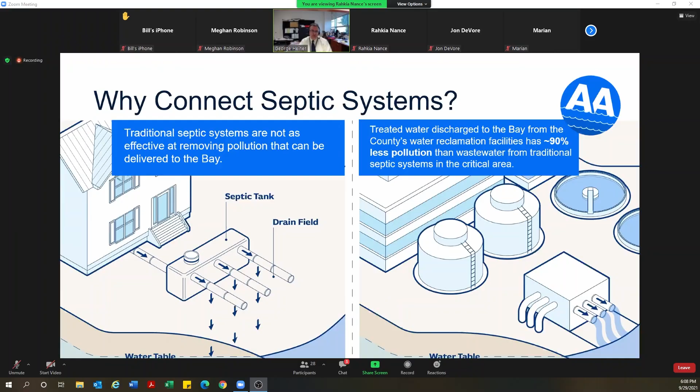Septic systems in general are a significant source within Anne Arundel County. There's 40,000 septic systems in Anne Arundel County, 13,000 in the critical area, which is within 1,000 foot of a tidal waterway. That's a significant proportion of all the critical area septic systems statewide. Beyond just that septic influence in the waterway that makes its way to the Chesapeake Bay, there's also impacts on the local rivers and watersheds within Anne Arundel County.

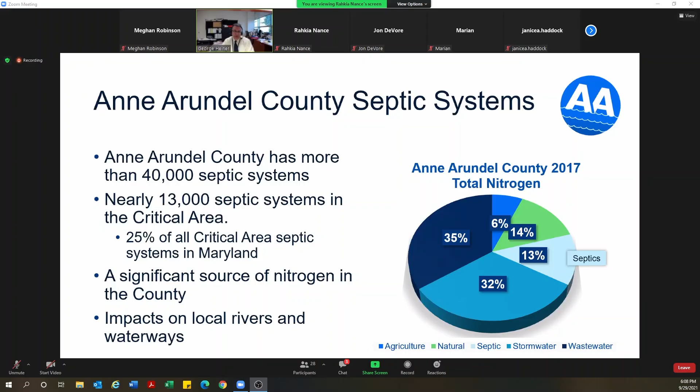Can you go to the next slide? So there's a lot of information on this slide, but to really condense this down, what this is showing is the average estimated nitrogen load from a household, one single household in nitrogen per year. On the right-hand side, you can see in the critical area, so there's that area very close to the water's edge, a typical conventional septic system would deliver about 18 pounds per year per household.

If you have a BAT system, which does 50% removal, that's a significant increase in removal, so that takes it down to 9. And then on the light green bar, which is our treatment plants, actually what they call now enhanced nutrient removal facilities, so we call them ENR facilities, if we discharge at the permit limit, that load per household would be 3 pounds per household per year, but our current performance has been about half of what the permit limit is. So really the current delivery from a household is about 1.5 pounds per household.

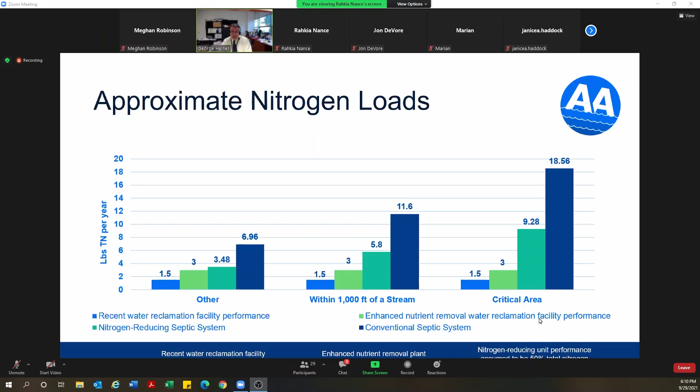So as you can see, there's a significant opportunity as septic systems connect to be able to reduce the nitrogen load to the waterways. The influence is greatest in the critical area because that's where the delivery is the greatest. Can we go to the next slide?

So what are some of the benefits of this whole program? For the general public and kind of where DPW is broader interested is in the decrease in nitrogen discharges into the Chesapeake Bay. This is going to help us maintain long-term requirements for nutrients. We're compliant right now with the Chesapeake Bay nutrient goals. Part of this multi-pronged strategy that I mentioned at the outset was, how do we maintain compliance going forward? So this program is an element of that overall strategy.

There's also some benefits for the homeowners, and these can be very site specific. So we're not going to really dwell on these, but we're going to mention a couple of the ones we've heard anecdotally from different people in some of these other meetings.

Sometimes the size of your septic system and your drain field is related to the size of your house, and if you want to do a significant addition or change to your house, that septic system can be a restriction. The drain field, whether it's behind the house or wherever it is, limits the use of that space within your property, and very often you need to have the drain field plus reserve space. So that can impact how you're able to use your property.

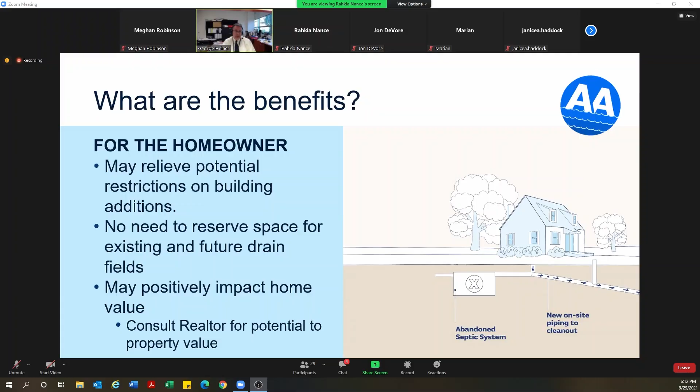There's also an impact on the home value. We're usually really reluctant to say much about that, other than to consult a realtor if you're really interested in knowing what the difference might be in the value of a home. So you can go to the next slide.

For those that are still on a private well, there's less risk of contamination from a septic drain field. In this diagram, we're showing the well pretty close, but that's because we're just trying to condense the graphic. As most of you probably know, there's quite a bit of separation between your well and your septic system. It's not unusual to see one in the front of the house and the other on the other side of the house.

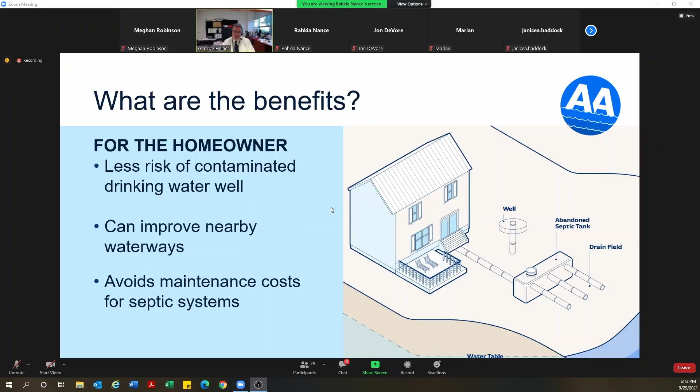We mentioned improvements to local waterways, and also you can avoid some of those ongoing septic system maintenance costs. So we have the next slide. These are very general numbers that we've taken from the state's website and some other research. It's just to remind you there is a cost associated with keeping a septic system, and from what we understand, replacing the drain field is one of the most significant costs if you have to get it replaced.

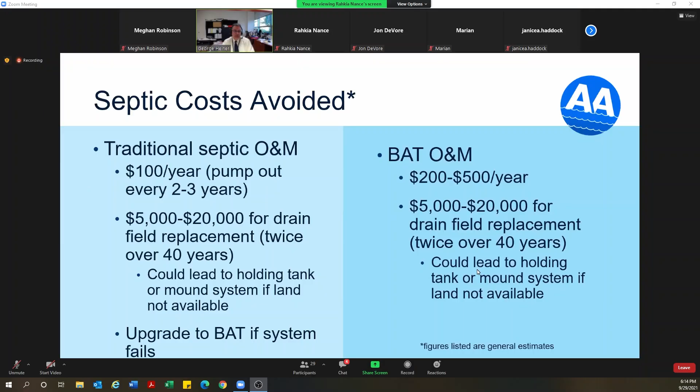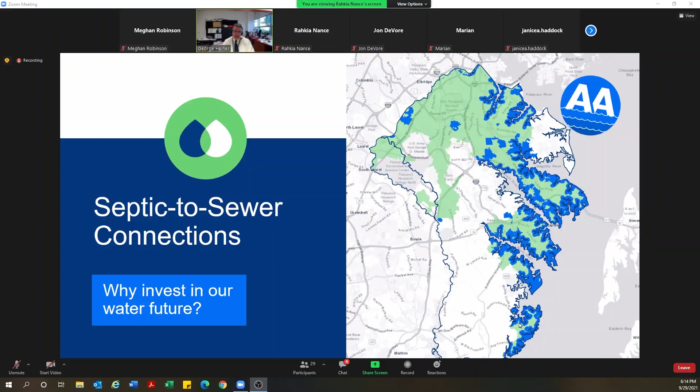Okay, so when we're talking about the septic to sewer connection program, it's really focused on specific areas that are called eligible areas in the county code. On this graphic, you see in green all of the sewer service area within the county, but the blue areas are really the focus of the septic sewer connection program. We'll talk a little bit more about what makes an area eligible as we get further into the presentation.

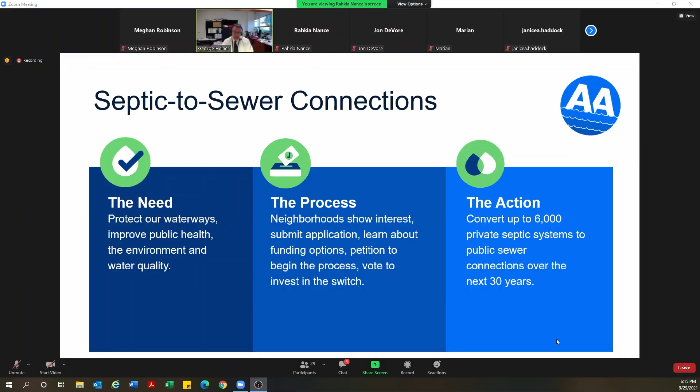So overall, to sum up the program: we have a need to protect our waterways and improve water quality. We have a process, the petition process, which we've refined with changes. We've been developing this process for neighborhoods to show interest, submit an application if they're interested, learn about funding options, and then move to the petition process if that's a good fit for them. Our action plan is to try to get 6,000 septic systems connected over the next 30 years, so approximately 200 per year.

So, this is a good transition. I know that this neighborhood had a sewer petition a long time ago—I don't quite remember how long ago it was. So there's probably some people on the call that are familiar with the petition process through that experience.

Most of what we're going to be talking about in this presentation are the things that have changed in the petition process. A little bit of background on how we got to this point: initially when the state came out with guidance for reducing nitrogen levels, it was looking for Anne Arundel County to reduce septic sector loads by close to 50%. Out of that inventory of 40,000 septic systems in the county, that meant we started looking at whether it was possible to connect up to 20,000 septic systems.

So we developed a lot of conceptual layouts, which is really the basis of the information we're going to be talking about tonight, and developed some basic costs for that. But we decided to start a septic task force, which had components from the business community, environmental groups, and community groups. We talked about some of the issues involved in trying to develop changes to the septic connection program, and used the task force to give us feedback on policies, prioritization criteria, and suggestions on subsidies, incentives, and our outreach.

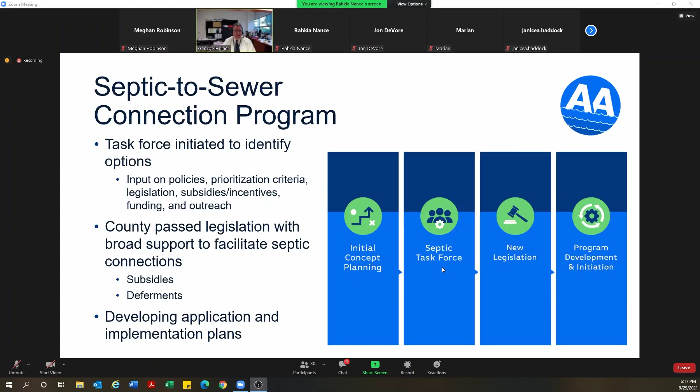We're going to be talking about that in more detail later regarding those deferment and subsidy discussions. Because there are so many possible areas that could connect, we've also developed an application process, since we couldn't practically offer subsidy to every conceivable area. So there's an application and ranking process we'll talk about later.

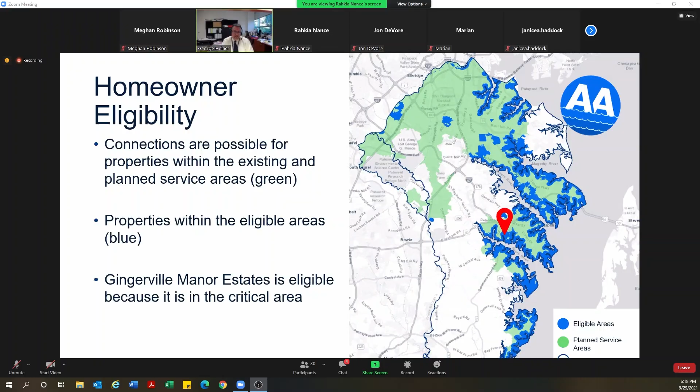A lot of the Gingerville area is eligible because it is in the critical area.

On this map is a potential area to be served. What I want to clarify is that this was a conceptual planning effort we were doing in DPW, looking at what areas could possibly be connected to the public system. This is not a defined project area that the county is planning to start. But we present it because we already have the information and an idea of what that area could look like if everybody in the drainage area was interested.

A little further on, we're going to talk more about a project area, and a project area can be any size. A project can be 10 houses, 50 houses, 100 houses, or everything here. The project area is really defined by the residents who turn in the petition.

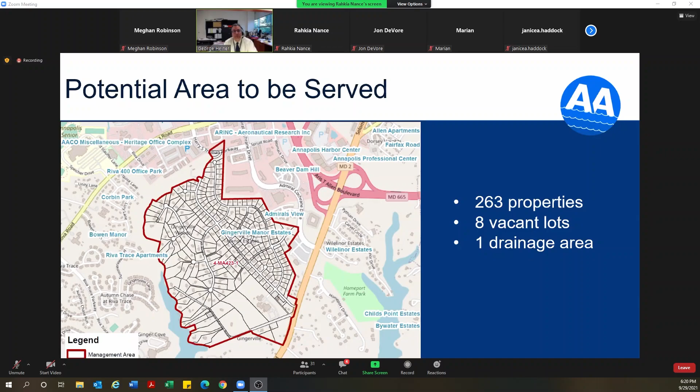So when we're showing this map, what we want people to understand is the possible drainage area. In this area, what we had conceptually worked out is that it could drain basically towards the southeast, where the county has a force main that runs along the main road there. This project would involve a pumping station and then a connection to the county's force main system.

With that, we're going to pause for questions. I don't have the chat open, so I'm not sure—I can read the questions, George.

The first question: I have a BAT system which put a restriction on my property deed. How will this process change the restriction? My understanding would be that that restriction would go away if you were connected to the public sewer, because that was one of the benefits tied to making that connection.

The next question: I understood the premise of your presentation, but I had understood that this area was on the county's master plan for future water and sewer—is this not true, or has this changed? It's true that it's shown for future water and sewer. What's always a little confusing, honestly even to me sometimes, is what that designation means. If it's in the future service area, that does not mean DPW has an active project in mind for serving that area. It's more of a planning designation—an area the county may extend service to at some point—but it doesn't mean the county has an active project in mind.

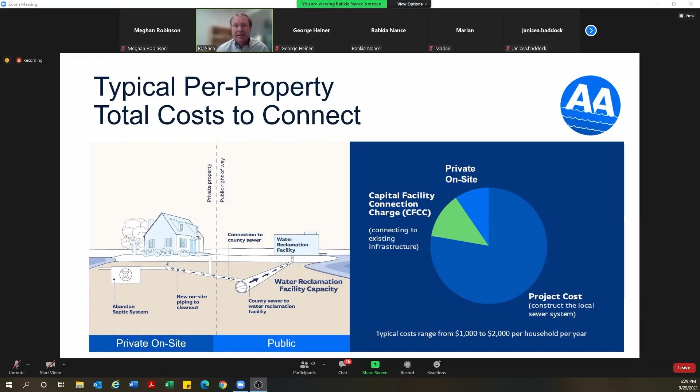Great, thanks George. So the county, as George mentioned, has developed a new program around the petition process to reduce costs. We'll go through some of the basic elements of those costs, illustrated in this figure. We've got the project costs to construct the local sewers in the right-of-way, typically in the street. We've got on-site costs, which we refer to as private costs — that's anything related to work on your property, abandoning the septic system, reconfiguring the piping that comes out of the home, and constructing the sewer lateral that brings wastewater to the main in the street. The third element is the CFCC, or Capital Facility Connection Charge, representing the county's investment in the water reclamation facility capacity to treat your wastewater.

On the next slide, we've got a closer-up version of this picture to give you a better sense of a typical layout — the typical septic tank, which is the heart of the system. The tank could remain in place, but we say it's abandoned, meaning the sewage is pumped out and hauled away.

The sewer lateral terminates at a cleanout that's at the property line, and that's where the county would have maintenance access to clean the line going into the trunk sewer.

This work on private property would be done by a licensed disposal system contractor, or a master plumber is the other certification we'll typically reference. This would be somebody that you would select. The county does not maintain a list of recommended plumbers, but there are certifications to get somebody who is experienced

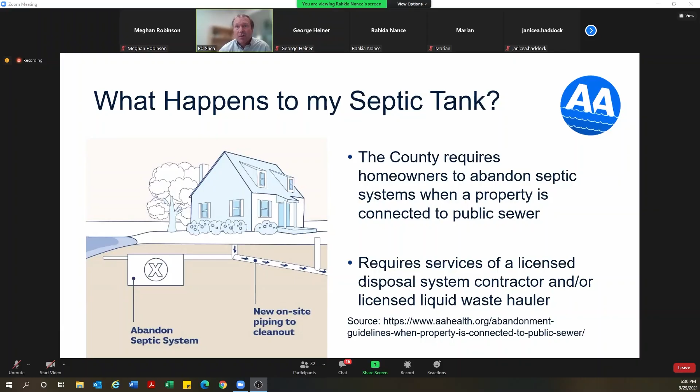So what are some of the average costs per household? The project cost, when we say project cost, we're talking about the public sewer element, the main sewer that's in the street. Per household, for your neighborhood, we'd expect that to fall in the $60,000 to $70,000 range.

We'll talk about that in more detail in the upcoming slides. But that's what we mean when we say project cost for the public part of the sewer.

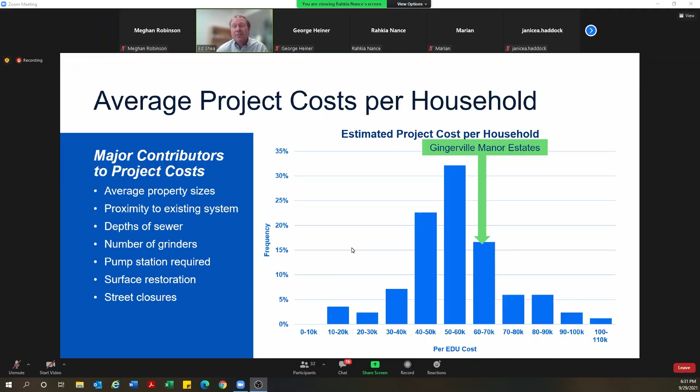For the on-site costs or the private costs, typically this would cost less than $10,000 per home. We've got a list of several projects that have been done over the last few years. That's where this bar chart is coming from, actual installation costs for the on-site work.

Most of the homes in your neighborhood tend to be set back a little bit further from the roadway, so that's one thing that could increase these costs, simply because there's a longer distance to connect to the main sewer. And as we said before, you control this work, so you're hiring a master plumber to perform this work on your property. So we'll pause there and address any questions we've received on those slides.

I'll go back up and pick up where I left off. There was some questions about doing sewer and water at the same time.

Yeah, I can talk about that one. With a petition, you can petition for a water extension and a sewer extension at the same time. We analyze those as if they were separate projects, and then the residents are asked to vote on them as if they were separate projects. But if they both went forward, they would be done as one project.

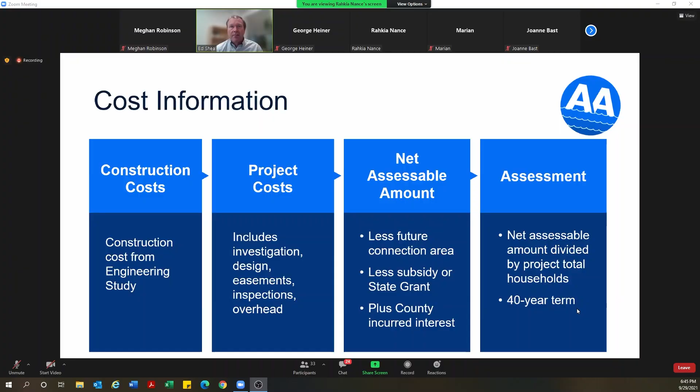As I mentioned, there's currently $20,000 available. We'd like to assume that about $5,000 of that per property could be used to lower the assessment and still have $15,000 left over to pay off the on-site costs in the CFCC.

There's also, in addition to the subsidy, a deferment option. This is another new feature of the program brought about by the legislation. Homeowners have the option to defer up to 50% of the assessment. Certain homeowners meeting criteria for elderly, low income, or permanently disabled — and there are clear definitions for this in the code, with elderly defined as 60 years old or older — have the option to defer up to 100% of the cost. The deferment goes for the 40-year term or upon property transfer. We're going to have some examples coming up to go through what that looks like.

Again, a comment on the BRF funding available: it's a half BRF grant, just like with the county subsidy, for households greater than $300,000. But those households still have the option to defer up to 50% of costs. For vacant lots, there is no option for subsidy, deferment, or the BRF grants.

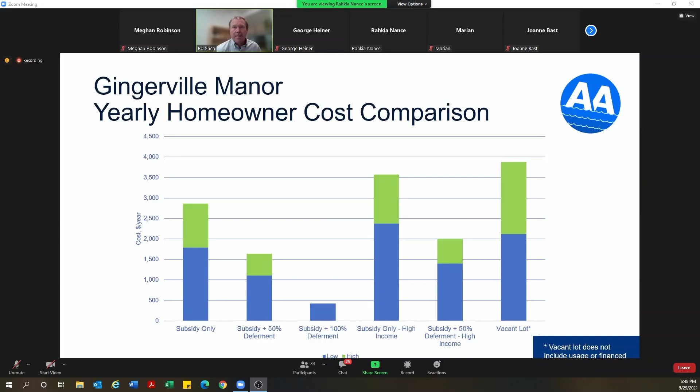So just a summary of these different options for the assessment and the homeowner private side costs. The goal is to have the private side costs almost totally paid if possible, using the BRF grants. The capital facility connection charge also could be paid with the BRF grant that is currently available.

Ed, if I can jump in, I saw we had a comment asking what is the CFCC right now in terms of dollar value. I was able to look that up. It's $9,351 right now, and on July 1st, 2022, it goes to $10,286. And to connect to the earlier discussion, if you did water also, those same capital facility charges apply, you pay the same amount for water. So if you do water and sewer, it would be $18,700 something for capital facility connection charges.

Yeah, and I see the question. I'll try to answer a couple more questions before I hand it off to Kim to talk about the deferment examples. But the criteria for ranking, I'll defer that one, because we have a slide about that a little later.

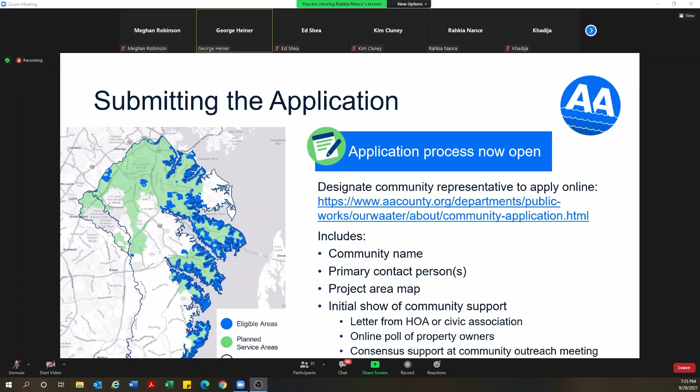So we did talk about the application, that's our formal presentation tonight. I'm going to ask the team to stay on to take questions, and we'll stay on as long as we have questions.

How can we be meeting the nitrogen goals at this rate? That's a great question. Rahkia, can you go to the slides, the first one with the stormwater? We've been making a lot of progress with our stormwater program and with the county's wastewater treatment plants, and the compliance right now with the nutrient goals is really on the backs of those sectors.

You're probably familiar with the stormwater fee, and that's been used. This is a graphic from their wonderful website, where you can learn everything about what the Bureau of Watershed Protection and Restoration is doing. They're making progress on a lot of goals, and that's been reducing loads.

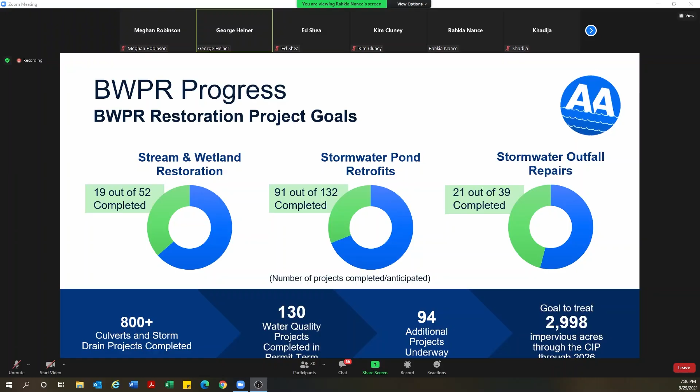If you could go to the next slide, Rahkia. This shows our wastewater reclamation facilities. I mentioned before we've invested a lot in these treatment facilities. They're really performing at a high level, probably some of the best performance in the state. And you can see here our loads are down 50% from where they were 5 years ago.

So our compliance right now in meeting these goals is based on the success we've had in these other sectors. As we go forward, more people are going to move in, so our wastewater loads are probably going to go up a little bit. We might have changes to the stormwater loads, so part of this plan is to figure out how we stay ahead of those nutrient goals, and that's where this more modest septic connection goal is coming from.

If someone didn't petition, how did you get the home to connect to public sewer? That's a really good question, and I don't really have the historical basis to answer that. I know that Anne Arundel County very generally had a lot of pre-existing communities before there were a lot of organized plans for water and sewer service. I don't really know the history very well.

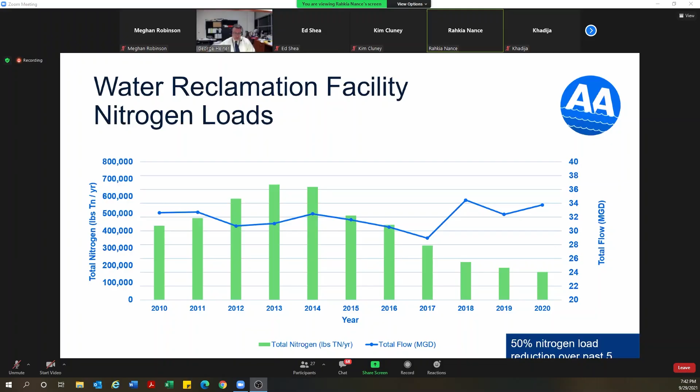The question is, what about areas without HOAs? We will try to assist with outreach efforts. We're not looking for an HOA or civic association to sponsor the project—it's probably more appropriate that we utilize their capability of communicating with residents, since it gives us a good way to reach people. But if a potential project area is outside, or there's a possibility, we can try to facilitate those discussions. We've had other areas where the drainage area goes far beyond an HOA or civic association's boundary, so if there were interest, we'd try to say, you should contact your neighbors up the street, that type of thing. Knowing where interest is helps us with that discussion.